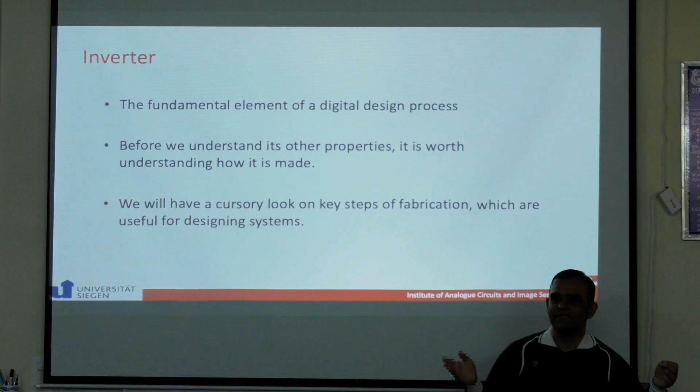To understand how a chip is being made and how we can predict what percentage of my chips are going to work, we will take the simplest circuit possible. All of you know what an inverter is, right? There is an NMOS below, a PMOS on top, and if you give 1, it becomes 0. If you give 0, it becomes 1. A low voltage becomes high voltage, a high voltage becomes low voltage. So a very simple circuit like that.

Now the reason why we can use it is most of chip design, except for analog people, is a combination of transistors in one form or the other. We looked at image sensor design, there were 3 transistors. Here we have one of each, NMOS and PMOS. If we can understand one of each, we can make any circuit possible.

Now the physical layout I explained to you kind of looks like this. If I do a vertical cross section of a chip, if I cut the chip one way, what we will see, there will be a P substrate and then either a P well or straightforward N-type diffusion. And there we are forming an NMOS type transistor. We will have a small oxide followed by polysilicon, followed by metal, and then on the N well we'll be making P-type structures.

Remember that the other day somebody asked, why is the diffusion red? In this color, the N diffusion has been selected as green, and P-type diffusion as whatever color this is. I'm partly colorblind. I can only identify red and everything else is boring. Okay.

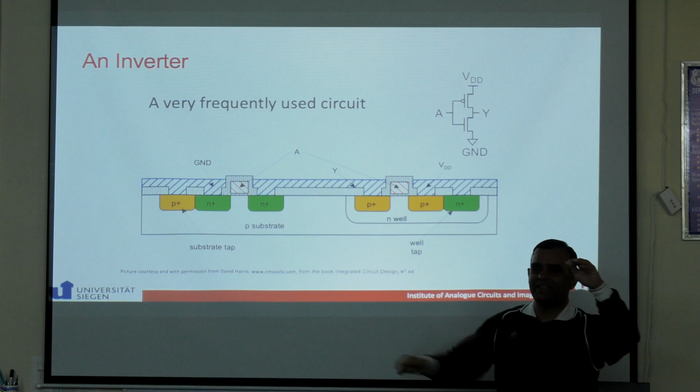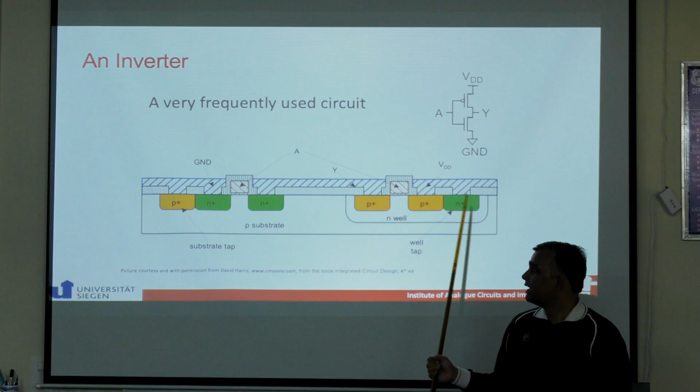Now, to the foundry people, and this is metal, the blue lines on the top is a metal which is just connecting. So this metal is connecting from here to here. And we separate these with these dotted lines. These are just oxide. They are dielectrics which are separating this. Right? So this is what my foundry will make when I ask it to make an inverter.

But we have done a very good thing in the microelectronics world. We have separated manufacturing from design. So electronics engineers don't care about how it is made. Metallurgical engineers don't care about what they are making, as long as we give them a design.

Okay? By now you would have learned that I abuse all of the departments of engineering except mine. This is the training of our Warangal to me. We are best, full stop. Okay.

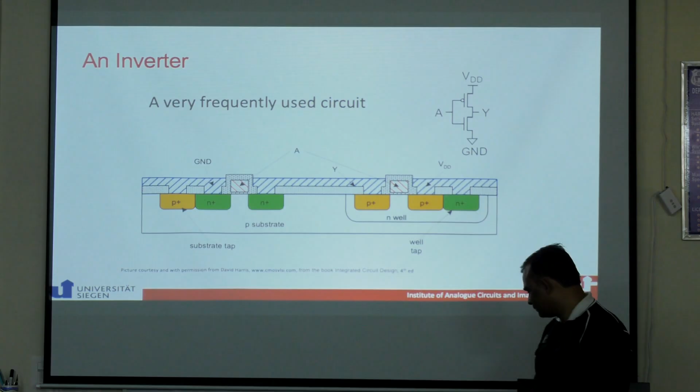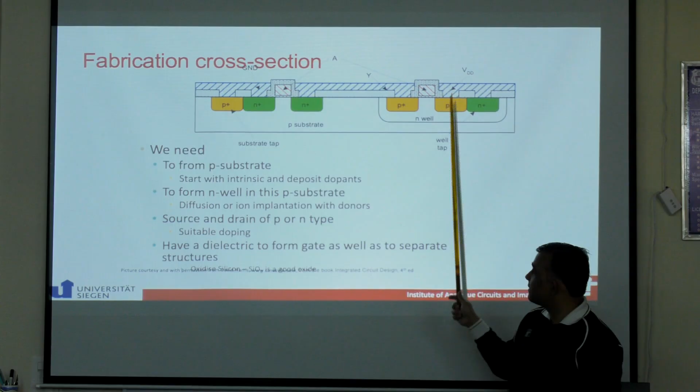So let's see, in order to make this, what do we need? So generally we start from the bottom and then we deposit things on top. So we need a P-type substrate, and then from there we need to form these N-type diffusion or P plus type diffusion. Okay? So we need to do some form of diffusion or ion implantation.

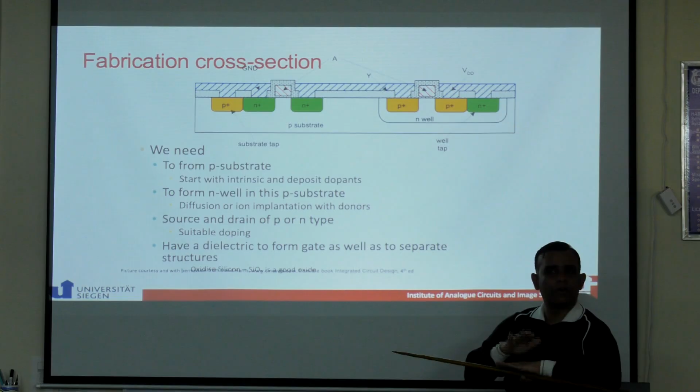So if I start with silicon, in order to form N-type, I'll be adding some sort of phosphorus, and to form P-type, I'll be adding boron gas. Okay.

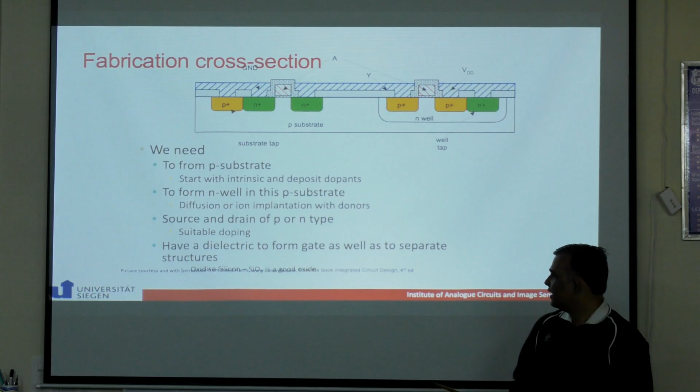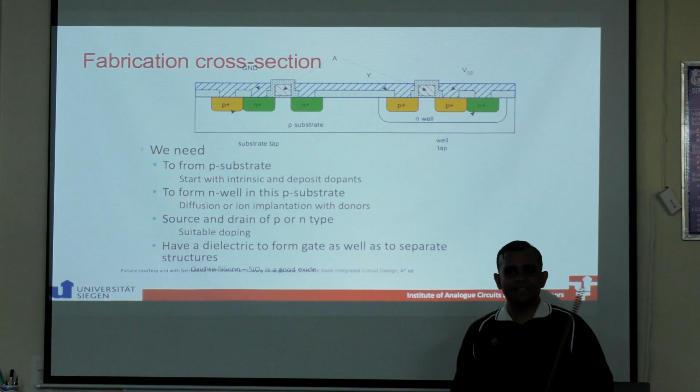We also need a dielectric to form the gate, and also to separate between different materials. To some extent we generally use silicon dioxide as dielectric. Silicon is already available, just oxidize it and it becomes a good dielectric. But not for the gate. For the gate we used to use silicon dioxide earlier, now we are using high-K dielectric.

We call this material MOSFET, metal oxide semiconductor field effect transistor. We don't use metal. In the transistor, metal has not been used for a long period of time. We use polysilicon, based on the theory of work function. We are not going into this, so take my word for it. We use metal to connect between different structures, so we need metal and polysilicon to do that.

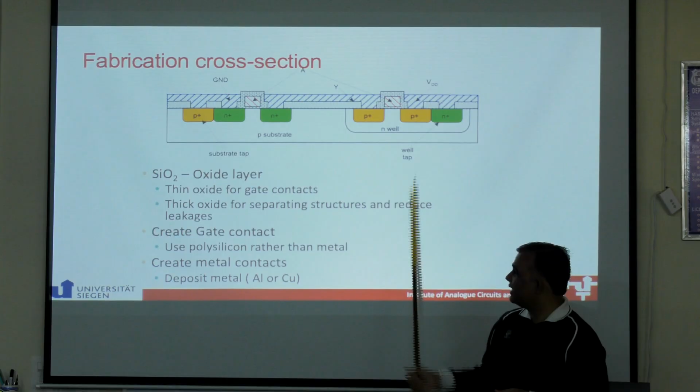In metal, historically we used to use aluminium. That was cheap and easy to make. Nowadays we use copper, which also has good conductivity. In the past it was difficult to make, now we know how to etch copper. We could have used silver and gold as well, but gold diffuses into silicon, so CMOS foundries don't want gold anywhere near them. But once a chip has been made, we use gold to connect to it, because gold is a very good conductor.

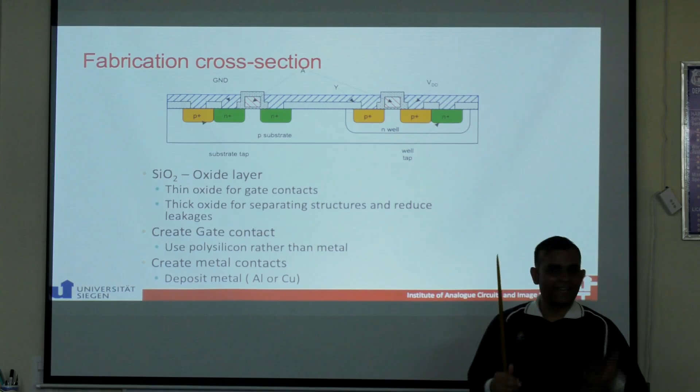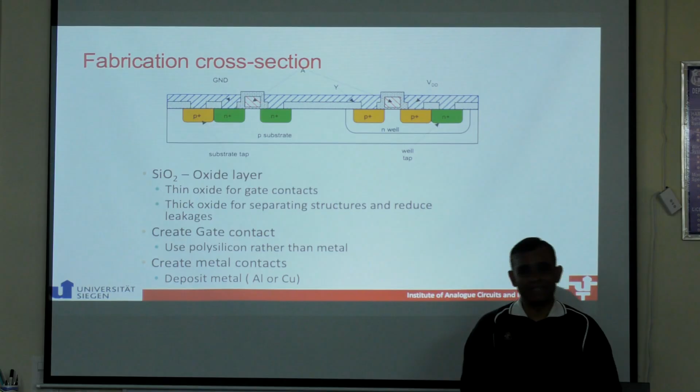This is why I could never understand why people waste gold the way they do, carrying the whole bank on themselves. So my apologies to all of you girls. People give gold gifts - if you go to a wedding, which I attended a few days ago, people are giving gold coins or gold bars. What's the use of that? It's just going to sit in a bank. I could make much better use of that gold bar - I could have so many good connectors made in my chip. But no.

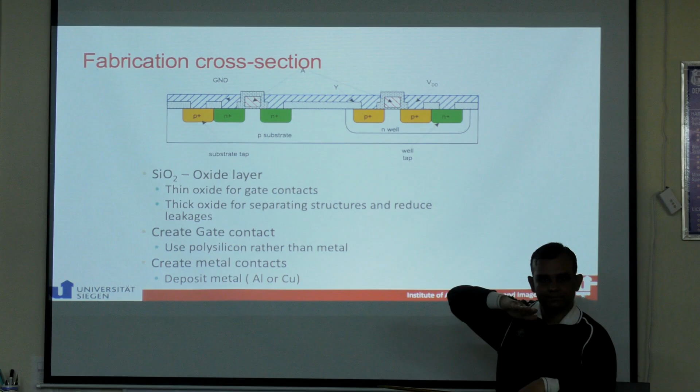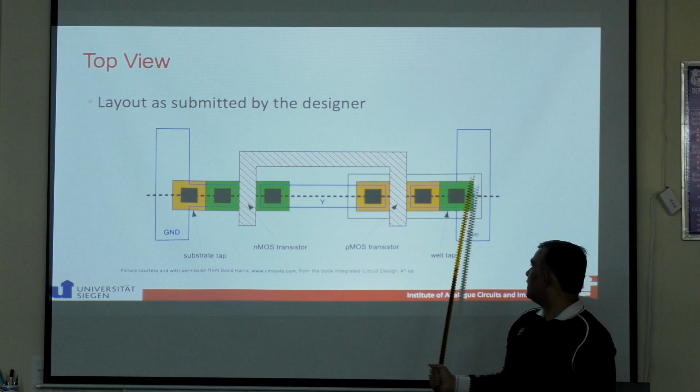So we basically tell the foundry: okay, in this region deposit diffusion, in this region deposit P-type diffusion, deposit this as my gate, and so on. In this region deposit a P-type structure. We basically tell the foundry where to make what.

The foundry doesn't care whether it's connected properly or not - they will make it if you say make it. By mistake I could have just drawn a big metal wire here and shorted everything, and the foundry will still make it. It happens to us quite frequently, as soon as you'll see.

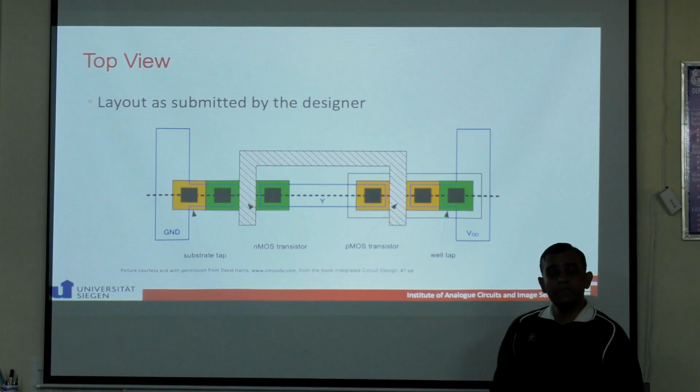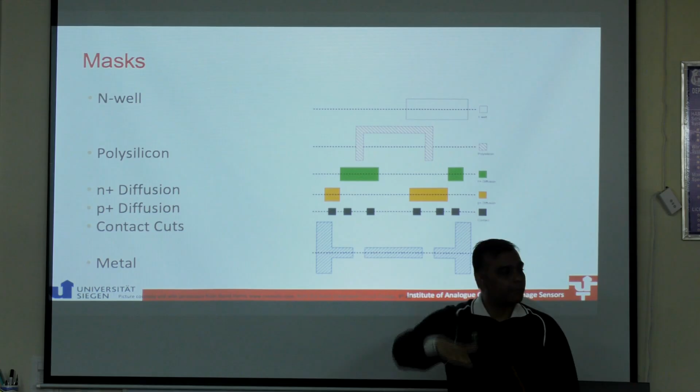Now, there's a reason I've put these in different colors - because each one of them is made at a different height. So when I send them in different colors or different layers, the foundry divides these into individual masks. They say, okay, that's where my N-well is going to be made, this is where my polysilicon is going to be made, this is where my diffusion is going to go, this is where my P-diffusion is going to go, and finally this is where my metal is going to go. Each one of these layers is made one at a time.

Now, we generally use this term 'feature size' to determine which technology we are using. So a 350 nanometer, or 0.35 micron, process makes the smallest structure of 350 nanometers. In the past this used to mean that's the smallest size of transistor, but as you've seen, it's no longer the smallest size of the transistor.

We also make these chips on a wafer, which is generally circular. For example, 300 millimeter wafer is now the standard. But if you take a 22 nanometer foundry process on a 300 millimeter wafer, we are making 10 to the power 12 transistors. No chip needs that many transistors right now, so generally on one wafer we make many subchips and then cut them.

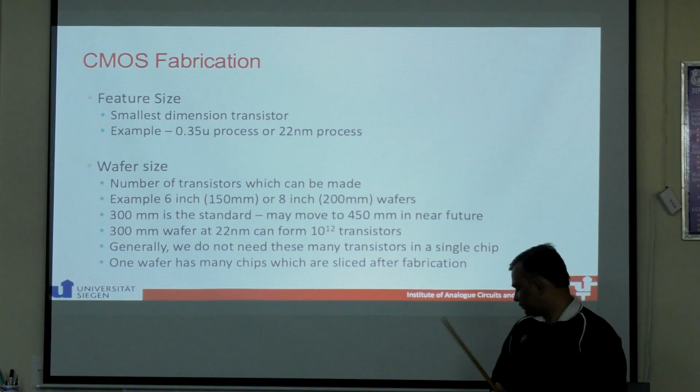Wafer thickness is fixed, it's not in our hands. A 300 millimeter wafer would be roughly 775 micrometers thick. For those who can't appreciate these numbers, your hair is 100 micrometers thick, so take 7 of your hairs and that's roughly the thickness of my wafer. For transistor size, take the hair thickness and cut it by 1,000 times or 100,000 times and you will get a transistor.

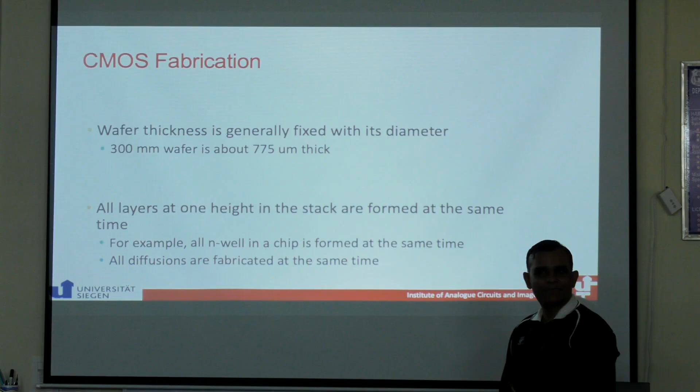Good, so let's make this thing. If this was not boring, wait for the metallurgical part to come now.

So start with a substrate. Generally the P-type substrates are already made for us.

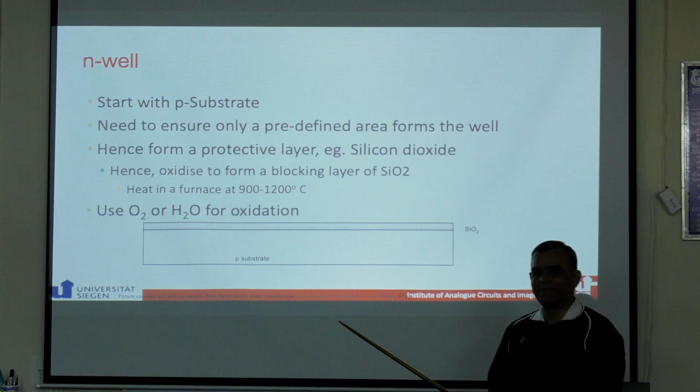Should I take a break? Break lena hai? Or continue karna hai? Break? Okay, even they realize that the subject is becoming boring. Let's take a break and we'll come back and we'll see the fabrication, then we'll see where we need the sensors, okay?

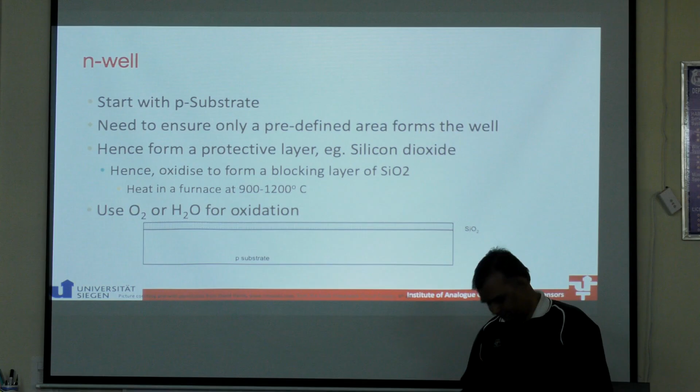So I will try to be a bit faster, but if you don't understand half of it, don't worry. It's more of an appreciation of what's happening. The next half will be more interesting.

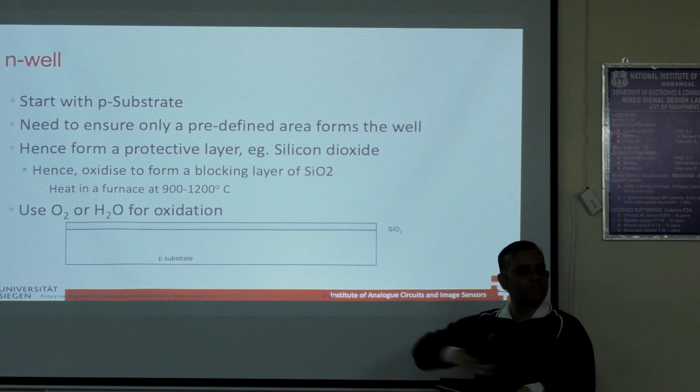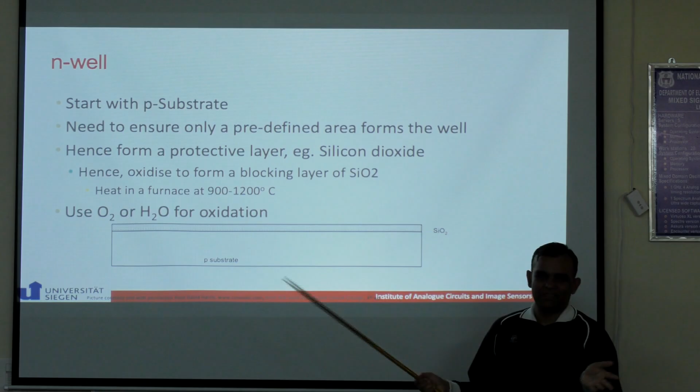So we need to form a silicon dioxide first. First we cover the entire surface of the wafer with a dielectric material, because first it's an inverse process. Rather than making the thing first, we first protect the area where we don't want to make things. So to oxidize this, we'll either use oxygen or water.

So once we have done the oxidation, then we need to identify the area where we are going to put things. We do it by some sort of lithography process. First we deposit photoresist, a material all across the chip, which is a UV sensitive material. If you shine UV light on it, it will melt.

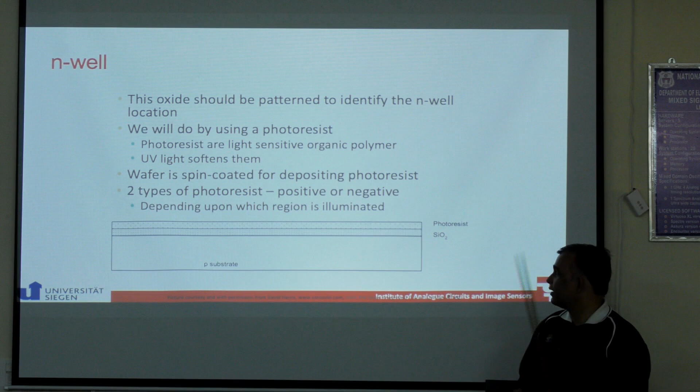And generally you spin coat the wafer. You put a drop and then spin coat it and it spreads out, and then you have got the wafer covered all around. You have different types of photoresist, some positive, some negative, of less interest to us.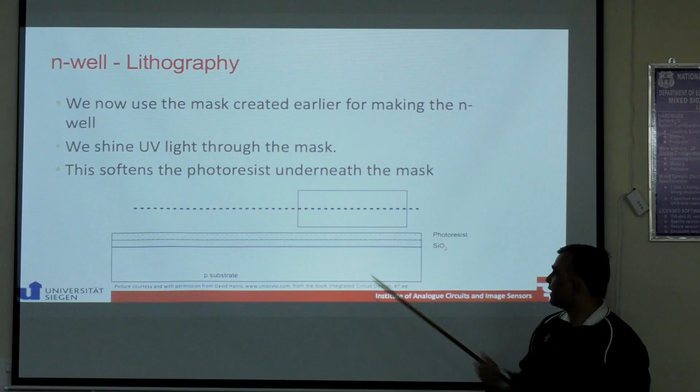Then what you do: you knew this was the area the designer gave me to make the N well. The mask, the first mask is there. We shine UV light through it, so all the photoresist below this softens up. Essentially we cut a structure like this.

Once we have done this, now we need to remove the oxide below there, because we are going to form the N well here. We are going to diffuse some material in there.

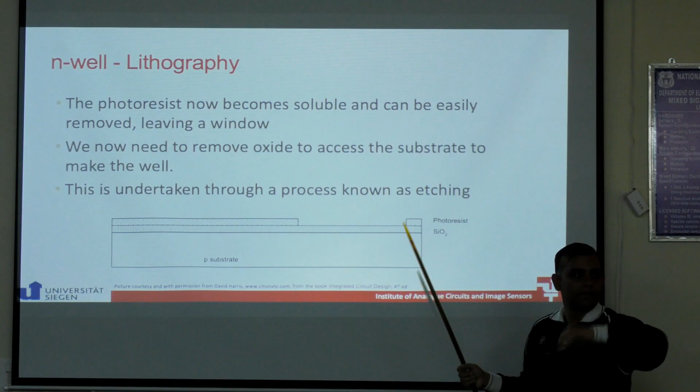This is done through a process called etching. Now etching is a harsh process. You pass hydrofluoric acid and that starts eating away the material. You have to be very careful; if you allow it for too long, it will start removing the silicon there as well.

Now this is a wet etching process. You also have a dry etching process.

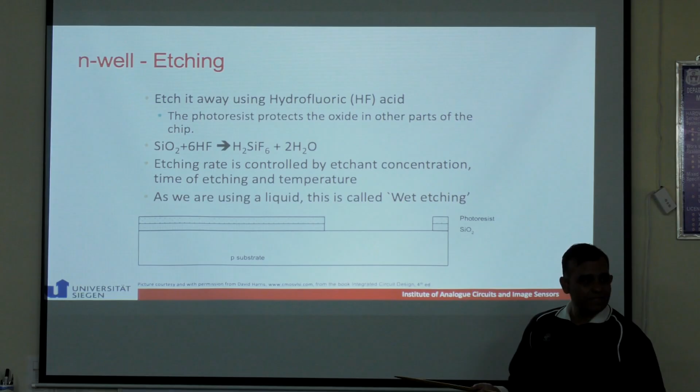Once you have done that, you then use a piranha etch to remove the rest of the photoresist which was left. Now this silicon dioxide is going to protect the rest of it from being formed.

And then we pass some dopant gas, arsenic or phosphorus, at generally high temperature, 800 to 1200 degrees Celsius, so that the dopant enters the silicon substrate and it goes from P-type to an N-well formation here.

Now this is the process which is a bit tricky, because based on the temperature and pressure of the gas, you could have lateral diffusion, things could go this way, and even though I have drawn it as a rectangle, it never forms a rectangle. It's always a structure like this.

Now controlling this is tricky, and this is where foundries have inherent recipes for what temperature, what pressure they are going to use, and that control takes a long period of time. Once controlled, you don't change it, because if you change it, things could start behaving badly.

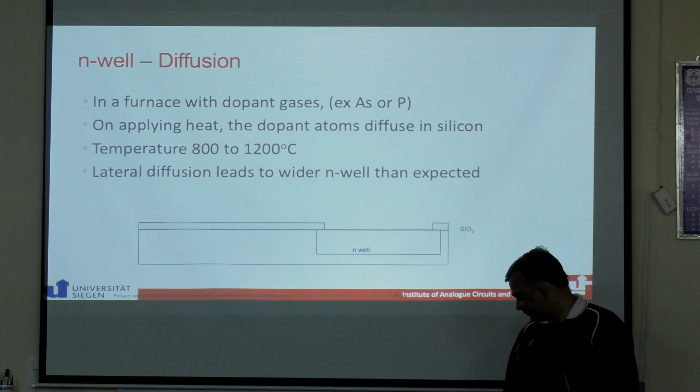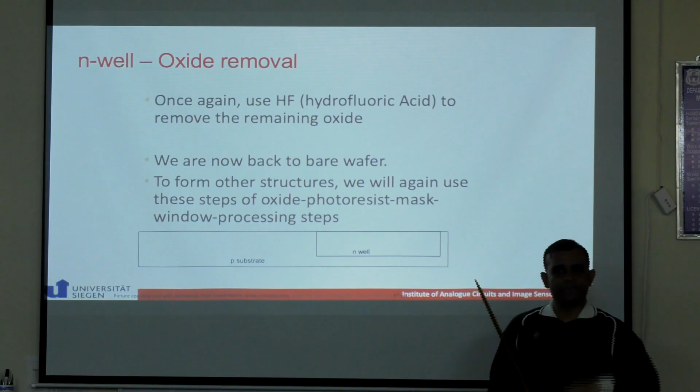Once you have done that, you again apply hydrofluoric acid throughout the structure to remove the oxide. So remember it this way: oxidize your structure, put photoresist on it, put the lithography mask, remove the photoresist from where you are going to form the structure. Etch, remove the oxide where you are going to form the structure. Remove the photoresist, form the structure, and then remove the oxide.

This sequence happens with every layer which we are going to form. Till now we have only formed the N well. The same sequence repeats for every layer, okay?

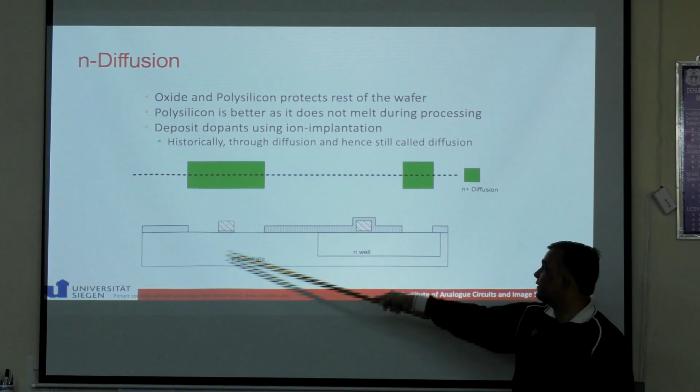Forming polysilicon, you form the gate first, and then you form the diffusion. Going a bit faster: this is where you put diffusion, that's where N-type material will be formed, and then P-type material will be formed there. So it's pretty much a similar process.

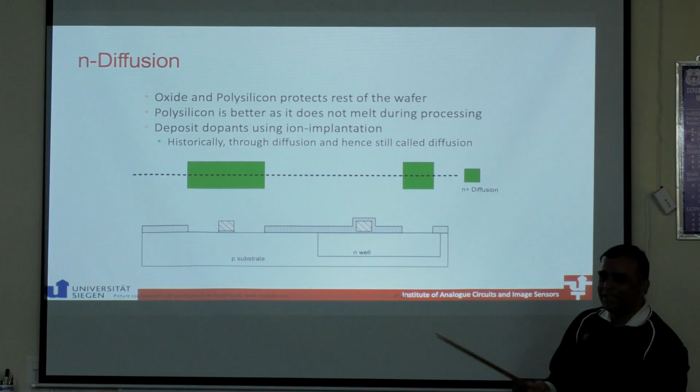Sorry, I should have told you what we are doing in N-type diffusion. This structure is called diffusion. Remember in the layout also we called it diffusion. It's no longer being used, the diffusion process, to make these layers. We still call them diffusion for historic reasons. The N-plus is now being formed mostly by ion implantation in smaller geometry processes.

And the same process again, repeat, repeat. Similar process, and now you dope with boron to make the P-type structure. We had made the N-type structure, now we make the P-type structure. And then you deposit metal. In modern processes, you have roughly 5 to 10 layers of metal on top of that.

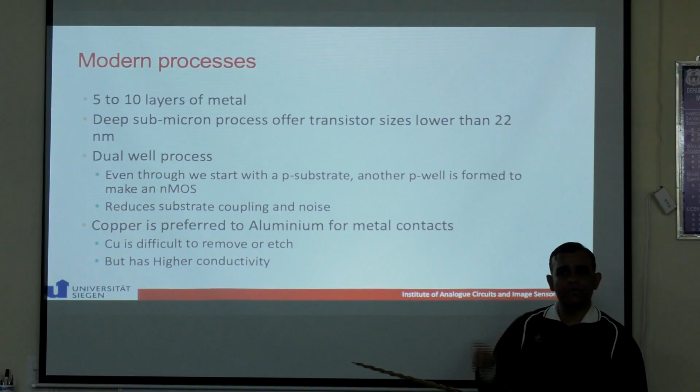Generally, modern processes also have dual well. We only formed an N well, but we would also have a P well in a modern process, and the transistors will be placed. The N-type transistor will be placed in a P well, and the P-type transistor will be placed in an N well. The other thing which I said, we have changed, moved to copper.

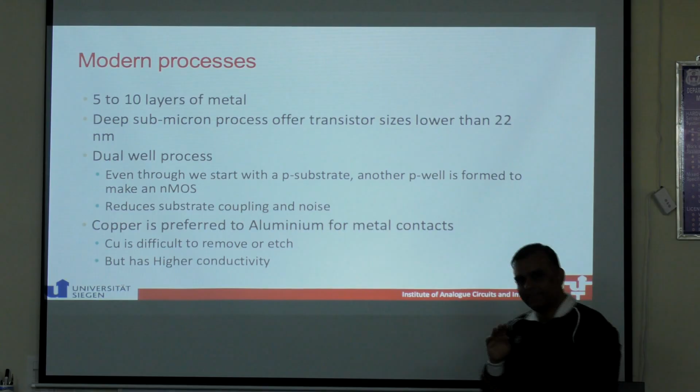Now I've gone through a 5-minute quick summary of how to make a CMOS chip. There's a reason I went through this. Each wafer goes through several hundred different process steps before a chip is made. Think of it this way: we had 6 or 7 steps just to make an N well.

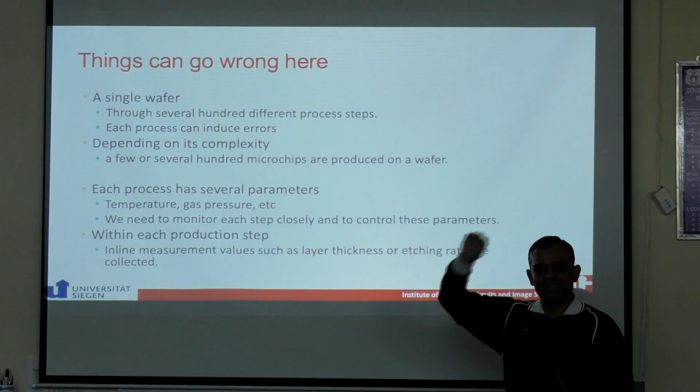If I have 12 metal layers, diffusion, oxide, I'm already at 12 plus 3, 15 into 6, 90 different steps. And I have taken a very simplistic approach of making this. Each one of these steps can induce an error.

What if my boron went too high? My doping concentration changed. My metal got deposited where it should not be, which has short-circuited the circuit. So all of these have errors induced at each step.

Now each process also has several parameters to control. Temperature is a very good parameter. If I'm sending a gas, it will be the gas flow. If I'm spinning it, it will be the actual speed of spinning.

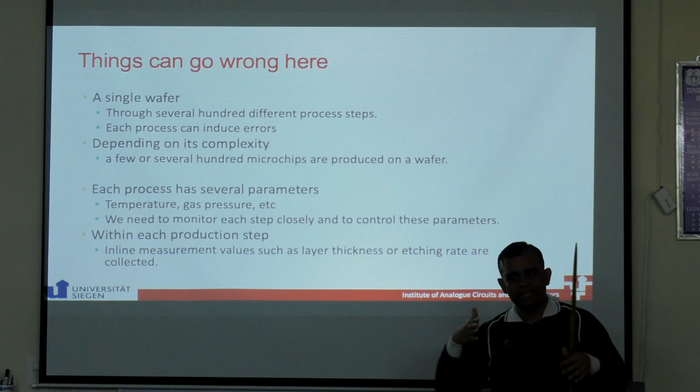Now we generally monitor each one of these parameters. We measure, remember, sometimes we are heating the wafer to 800 degrees Celsius. Sometimes we are sending hydrofluoric acid, and there the time becomes a factor - how long am I putting this thing in hydrofluoric acid? So all of these we monitor very closely, and we have sensors to measure each one of these parameters.

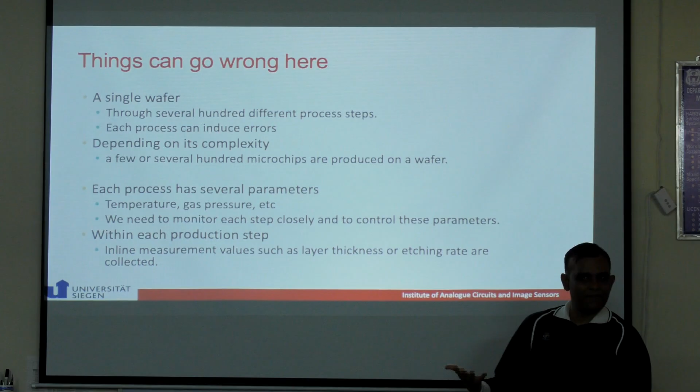And after each step, we also measure things like how much has been deposited, so we do layer measurements there. As you can very quickly see, I have 100 process steps, and in each step I have got about 50 different sensors. I have 5,000 different data sources - not data points, data sources. Temperature sensor, pressure sensor, timing monitors, and so on and so forth.

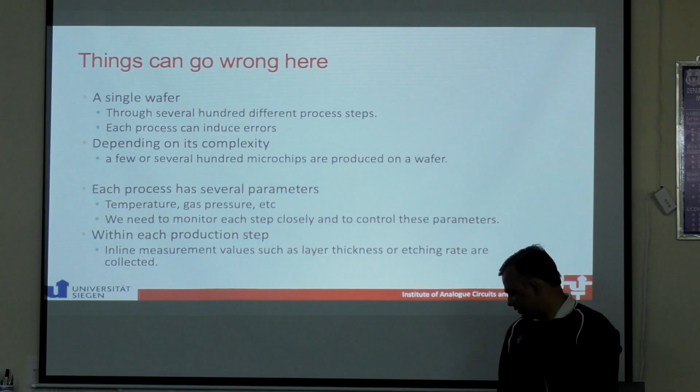And now we are collecting time series data of this. Over a period of time, if we started hydrofluoric acid formation there, the temperature was - and temperature doesn't remain constant. None of these remain constant anywhere; they are fluctuating. Taking this whole data as a whole is virtually impossible to do any processing.

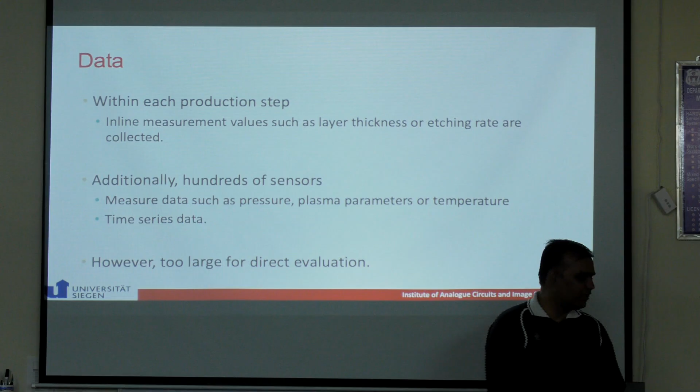Foundries do collect this data, and we have this thing called fault detection and classification. There are some things which we know will go bad. The moment we see the whole chip has been covered with metal, that's it, forget it, throw the wafer.

The problem is, what if we go through the entire process and make the chip? We can't test every chip - testing every chip will take a long period of time, and testing one chip takes a long period of time. Think of it this way: let's take a very simple chip with 10 binary inputs and 1 output.

That's a very simple thing. How many possible combinations of inputs are there? If I have just 10 lines, each with 1 or 0, that's 2 power 10 input possible combinations. Testing for all 2 power n is going to take a lot of time, even with an automated tester. Modern chips will have something like 144 or 244 pins.

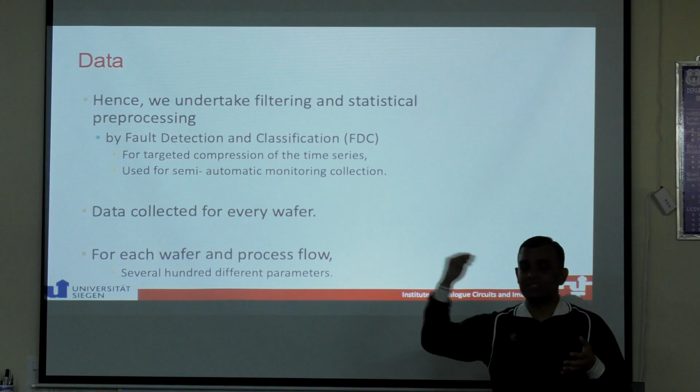So applying different input conditions and checking the output for each one of them will consume a lot of time. Modern chips also have inbuilt self-testing facility, particularly digital ones. Analog ones are tricky to have self-testing for.

The process is costly, and we would like the yield to be as high as possible. More importantly, it would be good if we can tell how many of my chips are going to work from this data which we have collected. Now, one can imagine, if my production data changes, my output system will also change. Temperature changes slightly, the dopant concentration would have been slightly different, the device performance will be slightly different.

The other thing I keep on talking about from the last 2 days is that no two transistors are exactly the same. So even transistors made on the same wafer, one side would have got more boron doping, the other side would have got slightly less boron doping. That will change the transistor. And then from one day I have made something, the second day I make something, there will be slightly more changes in the system. So we live within a certain tolerance of change.

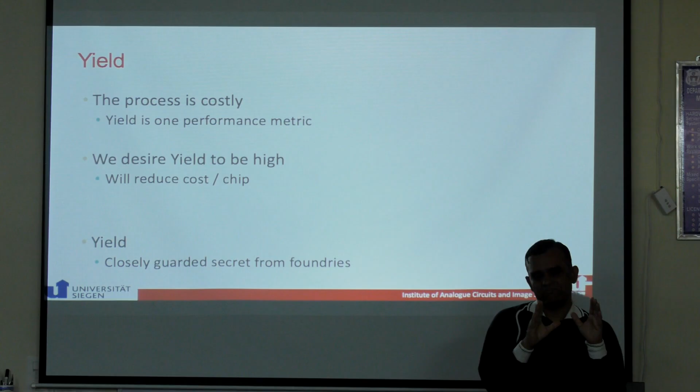Right? If it changed by X%, I wanted to sell a chip at 2.2 gigahertz, rather than 2.2, it's 2.21, I will live with that. If the performance is 1.7, I can't sell it as 2.2. I might sell it as a 1.7 gigahertz chip. But if it's 0.5 gigahertz, forget it, I have to throw the chip away. Right? So it will be good if we can predict the yield. If we can tell without testing how many of my chips are going to work.

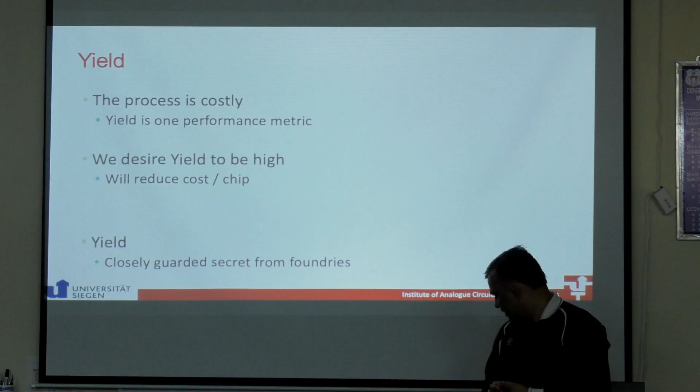Now it so happens, yield is a closely guarded secret. No foundry ever tells the number. The entire foundry business is a closely guarded secret. We know the steps. I told you the steps. We teach the steps. But what's the exact temperature? What's the exact pressure? How long is it done? It's a very closely guarded secret. Even the ones which I know of my fab, I will not tell anyone else. Because it has taken a long period. That is our intellectual property.

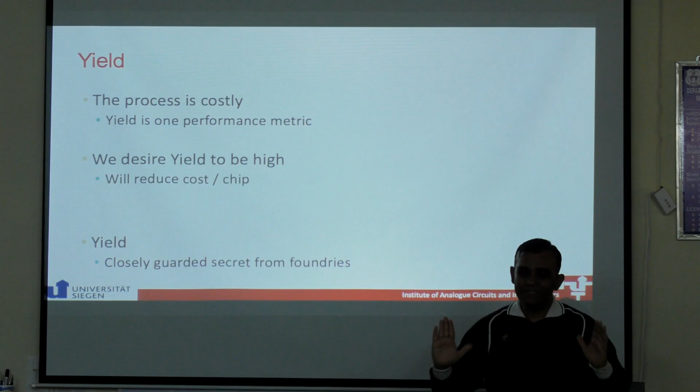Right? All chips are now being made by the same sequence. The devices are the same. The material is the same. It's just the mix of process steps which is slightly different for each one of them. Okay, some of them have patents on high-K dielectrics, only they can make few nanometer chips. The devices to make photolithography kits are export controlled, so only a few countries can make them. So I can understand, but otherwise the sequence of steps is fairly well known. Okay.

So our task, we're working with a German foundry, was: can we predict the yield based on the process parameters which we have collected? So we have a huge amount of data which we have collected. In the past, we have also measured the yield, how many of the chips were within average performance parameters. So rather than this ability to measure, can I tell beforehand that if you go down this route, the chip will work or the chip will not work? Can I predict the yield?

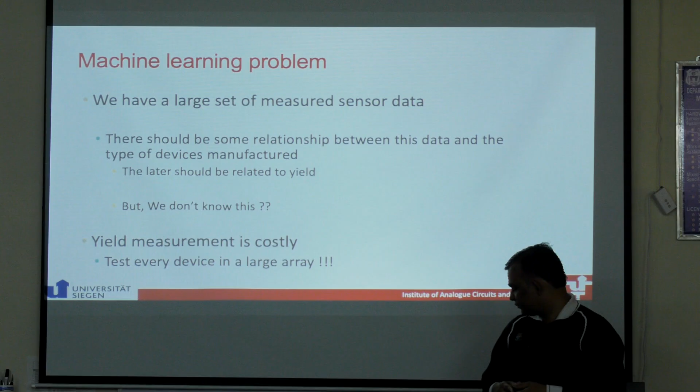The other issue is, there are two things which are an issue here. One is knowing exactly what percentage of my chips are working. 95% of the chips on this wafer will work. Or I put a threshold. If I'm making less than 90, that wafer is not worth selling in the market. Because even after the wafer has been cut, I need to dice, cut my chips, package my chips, and then test it. So it's going to cost me more.

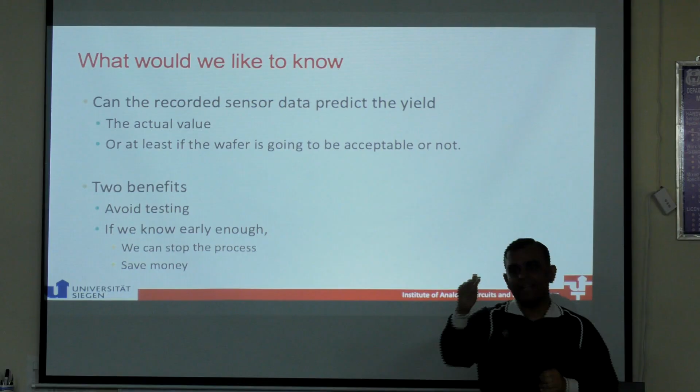So if I can just say, you know what, this is below my threshold, don't test it, even that would be okay. So I have two problems now, and for computer science these two problems become the classification problem, good versus bad, or telling exactly what's the amount, how many of my chips are going to work. So the good versus bad problem is slightly easier. The regression problem, telling the exact value, as you can see, would be slightly harder.

It becomes even harder because no foundry makes their data public. It's not like computer science image databases which you have, wherein a number of you will do your project, run a new neural network algorithm and say look, I can identify human beings in the picture. This data is not public. The only way you get it is if you're working with a foundry, people like us who had access to some of this data.

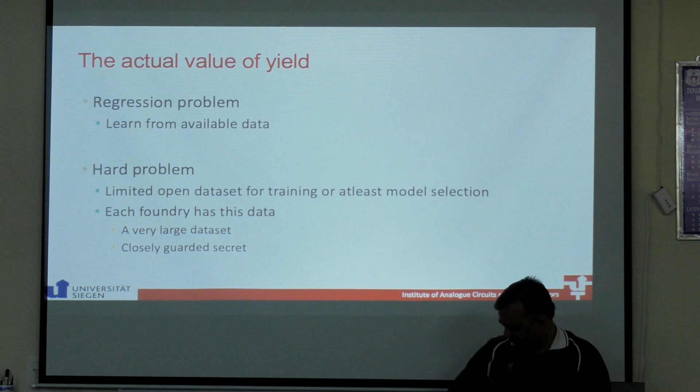The classification problem has been studied by a lot of people in the past. The regression problem has not been studied. So I'm going to give you an example of a problem set which we studied, as to how it worked. Okay? So now I'm slowly moving you towards the brain part of the robot.

Now before that, we do just a quick summary of the kind of algorithms which are there. So have you guys done data structures in your bachelor's? Right? So you have learned about trees, decision trees. Smile on some of your faces says yes, we remember hearing that word. So we would be using a very simple structure called random forest, which is essentially a combination of very small classification trees. So you make a large number of classification trees.

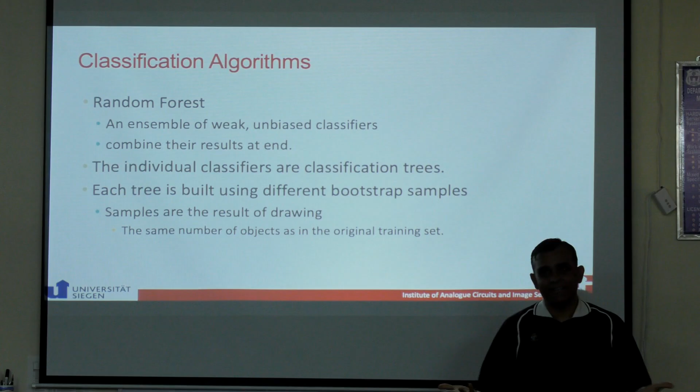Each tree tries to classify the data. And in the end, you do a polling. If the majority of my trees say the data is good, you say the data is good. So rather than making one large structure, you make several small decision constructs. It's like asking all of you guys, is my lecture boring? If the majority of you say it's boring, then it is boring, right? So that's what we are doing. We are not having one expert classifier, we are having multiple small expert classifiers.

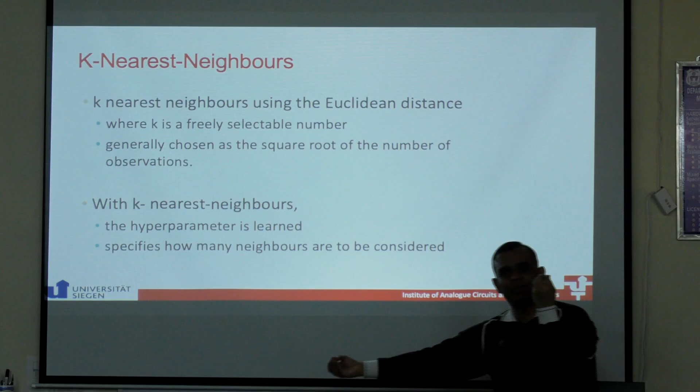Okay. I will not delve into how random forest is made. It is on the lecture slides online and you can have a look at this. There are other algorithms like k-nearest neighbors as well, which basically try to look at how many are close to me. If I think this is good, how many of them are in this basket and how many of them are in the other basket. You just try to find in a space how many of them are nearby.

Anyway, I will jump into the data to show you how complex this can be. So we looked at 35,336 wafers which were made over a period of 6 months in a 350 nanometer auto foundry. So the chips were made for automotive production. Now automotive chips are always made 1 or 2 generations, or many generations, behind the commercial chips. You know why? So all moving things like aeroplanes or cars, we don't use the most modern chips, generally speaking, the ones which are used in consumer electronics. Could you think of a reason why?

There are a few problems in modern chips. They have not been tested for long enough. You buy a mobile phone for 3 years. You don't buy a car for 3 years. Right? You don't buy an aeroplane for 3 years. If your mobile phone hangs, it hangs. You don't want your aeroplane to hang mid-air. Right? So you don't have the luxury of errors introduced in the system.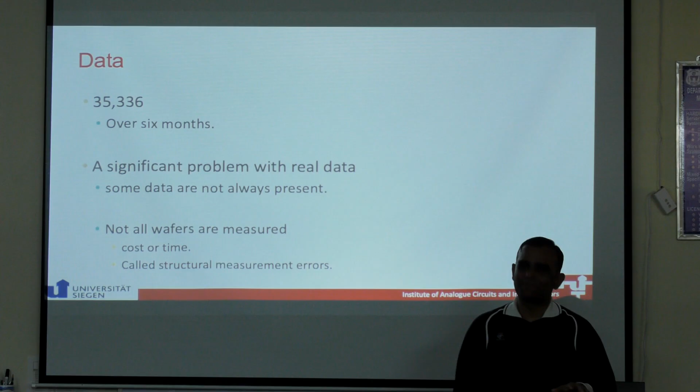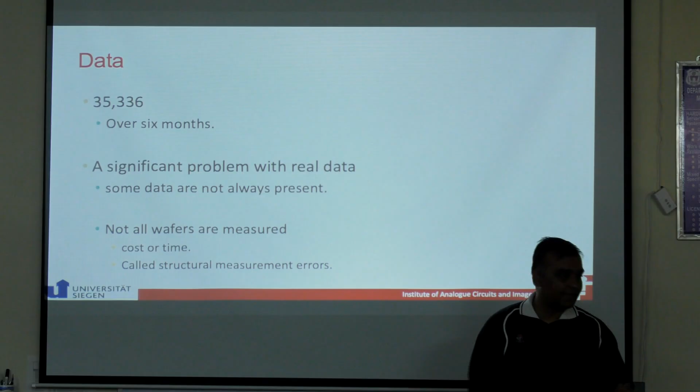Now, at this point you might say, okay, 35,000 wafers, each wafer having loads of data samples. Now this is where real data becomes a problem. Not all the time is data present. Some of the sensors could have been switched off at that time, or they were giving erroneous data. When you have a large number of sensors, you can't expect all of them to be giving true data at the same time. Okay? So there was data missing as well. And this happens because of a number of other factors. Okay?

And not every machine gives the same sensor data. So if I have, say, an etching machine, I thought it had 5 sensors. In one run, I got the data from all the 5 sensors. Another run, I only got 3 sensors which produced my output. Okay? So a vital step in almost all of these steps is to pre-clean the data. Now I have got a huge amount of data here. Let's have a look how much data I have.

Oh, I haven't given the data number here. Okay, the data number will come soon.

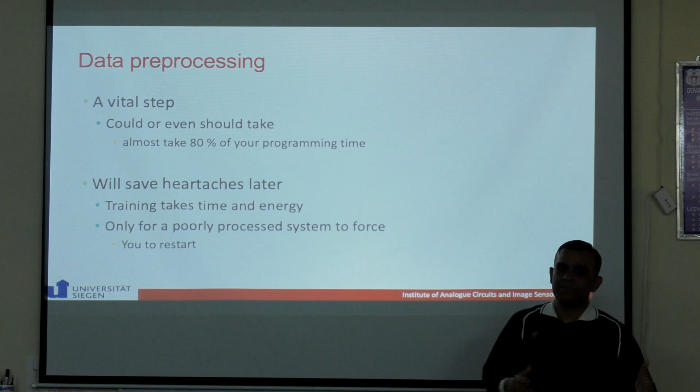So we could not deal with this large number of sensors. We had roughly 650 different parametric steps, and we wanted to come up with one output here. 650 input measurements, one output, good or bad. That's it. That was too large a space to train a small neural network. If you're running a neural network on a GPU cluster, then that's perfectly fine.

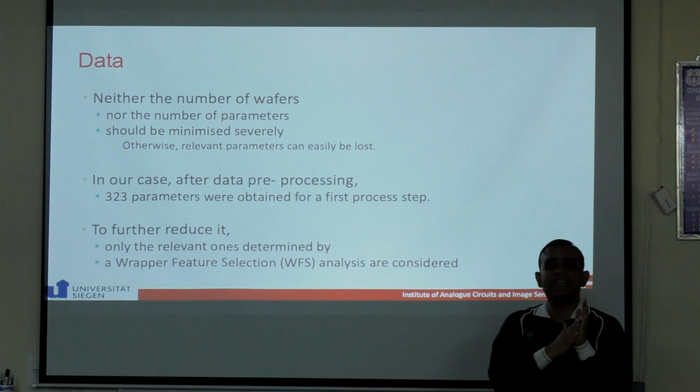So we tried some data processing, and we looked at a wrapper feature selection method to extract what are the prominent parameters, which parameters cause the most change in the output. And we reduced it to about 323 parameters. Okay. Even that was heavy.

We then started doing principal component analysis or Boruta analysis, which again looked at which of these inputs matter. Now we are looking at them as parameters. We don't care whether they're temperature data or pressure data. They are numbers. So from these numbers, I'm trying to get an output. One output will be good or bad. Another is yield. Is it 90% correct, 80% correct, 70% correct?

So I looked at this comparison matrix, and Boruta found that a good number of these sensory data were actually not causing much change to the output. By their interactions, yes, but individually they are not causing much change to the output. There were some which were doing big change, the green ones, and there were some which were in between.

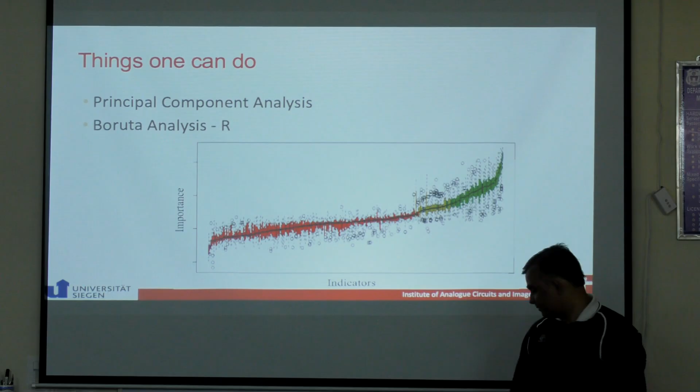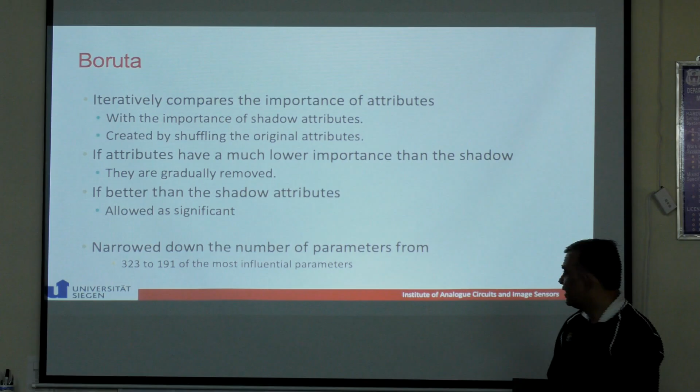So we took this data and we iteratively kept on checking. So what if I remove this data point? Does it still look valid? If I remove the other one, does it still look valid? If it doesn't, then I put it back. So we ended up with about 190 odd data samples. Okay. Now remember a chip is going through multiple processes. In each process I have 320 data samples, which I have reduced to 190 data samples.

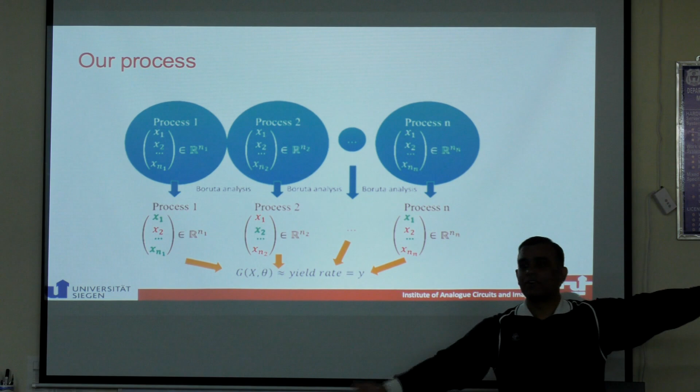Now the sooner I can tell that my wafer is going to go bad, the more money my foundry will save. It will stop the rest of the processes. Okay? So if I can just tell after the first process, hey, this sample is not good. And there's no direct relationship. It cannot say that one temperature caused the wafer to fail. It could have been a sequence of events which led the wafer to fail. Okay?

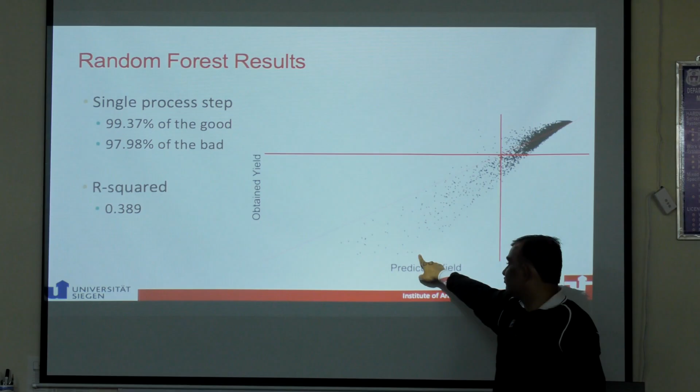For the ones which are bad, I cannot find it. I mean, ideally this point should have been here. So the predicted yield was, say, 85%, and I was getting 81% kind of thing. But what I'm okay in predicting is this is going to be a bad wafer. I cannot tell that 60% of the chips will work, but if my cutoff threshold is 80%, anything below 80% is bad, I'm okay in telling good versus bad wafer.

This is after one process step, right? We were looking at a system with 4 processes, one after another. So even after one process step, I can identify 99.37% of the good wafers and 97.98% of the bad wafers. These numbers look good, but they are not good. So take my 2% of bad wafers.

Remember, I had 65,000 wafers, right? Each wafer would have roughly 1,000 chips. So 65,000 into 1,000 chips. Okay, I did wrong prediction on 2% of these. So 2% of 65,000 will be roughly 1,200 ish. 1,200 into 1,000. I'm sending 1.2 million bad chips into the market.

Okay. So despite the fact that from a computer science prediction point of view we are very good, you can pat yourself on the back, when you look at the actual numbers, things are still problematic. When you look at all process steps, we of course significantly improve. Now we can predict 99.38% of good chips. So we only miss about 0.6% of the wafers, and 98.78% of the bad ones. So we are doing a much better approximation.

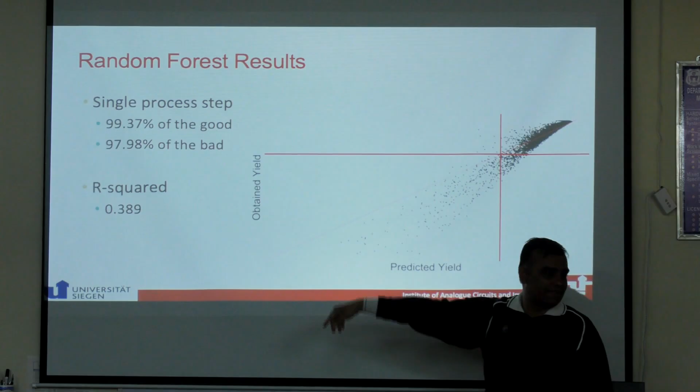But what I'm okay in predicting is this is going to be a bad wafer. I cannot tell that 60% of the chips will work, but if my cutoff threshold is 80%, anything below 80% is bad, I'm okay in telling good versus bad wafer. This is after one process step, right? We were looking at a system with 4 processes, one after another.

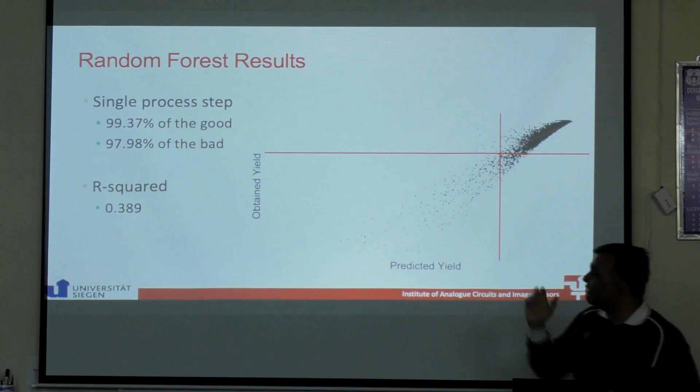So even after one process step, I can identify 99.37% of the good wafers and 97.98% of the bad wafers. These numbers look good, they're not good. So 2% of my bad wafers, remember I had 65,000 wafers, right? Each wafer would have got roughly 1,000 chips. So 65,000 into 1,000 chips.

Okay. I did wrong prediction on 2% of these. So 2% of 65,000 will be roughly 1,200-ish. 1,200 into 1,000. I'm sending 1.2 million bad chips in the market. Okay. So despite the fact that from a computer science prediction point of view we are very good, you can pat yourself on the back, you look at the actual number, things are still problematic.

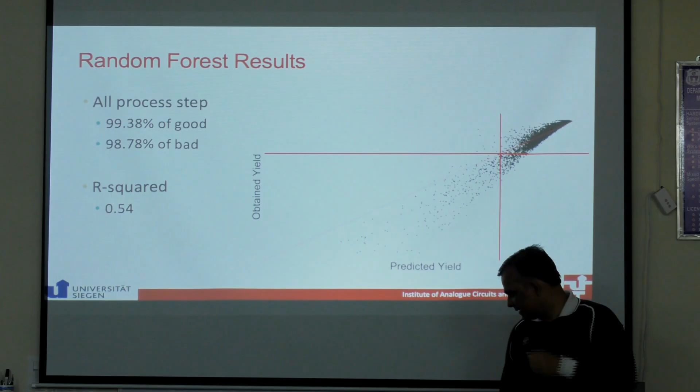When you look at all process steps, we of course significantly improved. Now we can predict 99.38% of good chips. So we only miss about 0.6% of the wafers. So few wafers we missed, and 98.78% of the bad ones. So we are doing much better approximation when it comes to that.

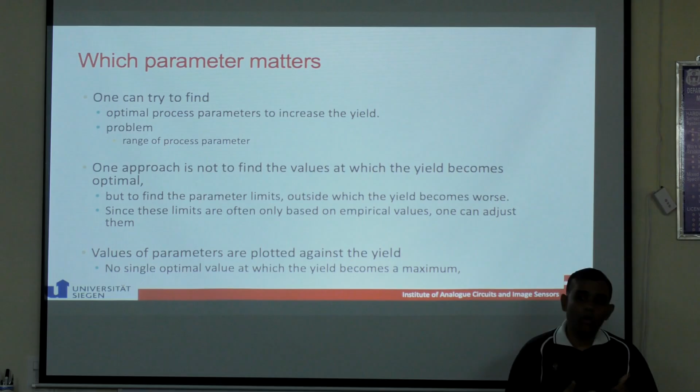Of course, one question which we were asked is, can you do the inverse? Can you now tell me which process step to improve to get a good yield? Or if I'm going down the bad design, can I change something later on to improve the process to become good yield? We tried that and miserably failed.

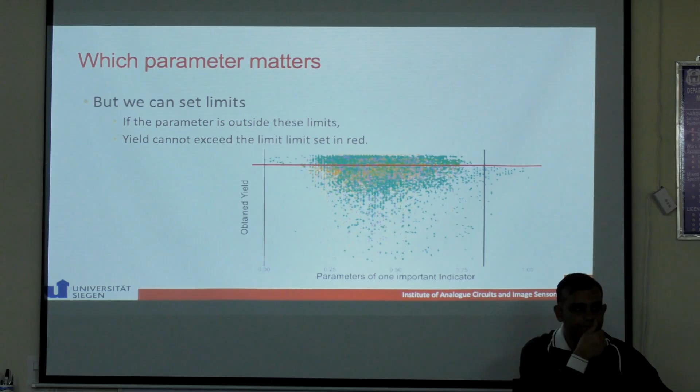What we could say was that if something has gone down this route, whatever you do, it will not improve. But we cannot predict the exact amount of yield till now. It's a work in progress. This is not the final work, but the inverse solution we have not been able to answer till now. So given a set of sequences, I can tell whether it's going to be good or bad, but then to say which one or which few of the parameters to change to get a better yield is still a very difficult question. And you can imagine, I started with something like 600 different parameters. I've got one output. From one output going back to say one of these 650 or 5 of these 650 is challenging. Okay. Now, I went through a very quick summary of how to make chips and how we did one work on predicting the yield. That looks good, but it still required a good amount of computation power. It runs overnight. I cannot tell live as my data is coming that, hey guys, stop. And that's the problem. A large number of artificial intelligence algorithms cannot work live. So I went quickly here, and then I will also go, if I can.